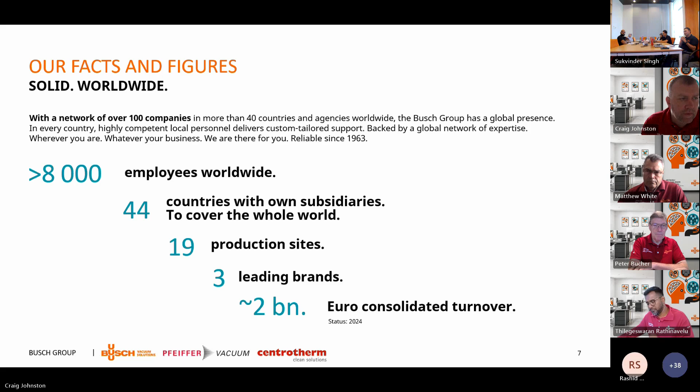Just to concentrate a bit on the Busch side, so you can see where we're based - really all over the world, with various companies in different countries, and production sites that cover the complete geographical spectrum. So we have a very extensive global network, and we are always local to our customer base.

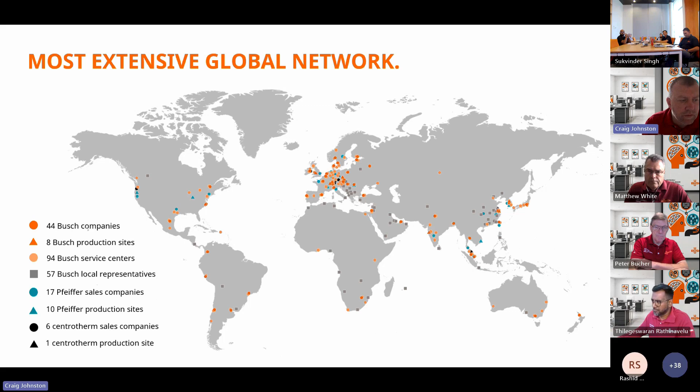So we have a portfolio of 14 different types of technology, and we all have an individual name, let's say, for the different types of technology.

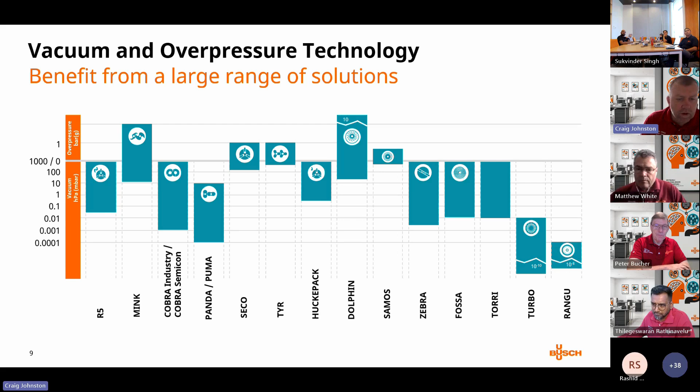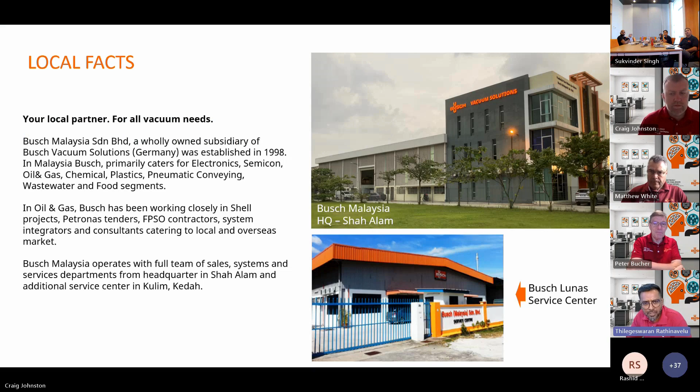Just a little bit on Busch Malaysia. Busch Malaysia is a wholly owned subsidiary of Busch Vacuum Solutions Germany. This distinguishes us from the distributors or resellers we normally see here representing a principal brand, where our focus is not just to build inventory throughput or number of pumps, but we ensure customer after-sales needs are catered at its best long after the purchase.

This we do with multi-year service contracts with end users to ensure asset reliability is sustained. Busch was established back in 1998 in Malaysia, and in the last 26 years we have been supporting our Malaysian customers in various segments, including oil and gas, electronics, semicon, chemical, plastics, pneumatic conveying, wastewater, and food segment. In the oil and gas segment, Busch has been working closely...

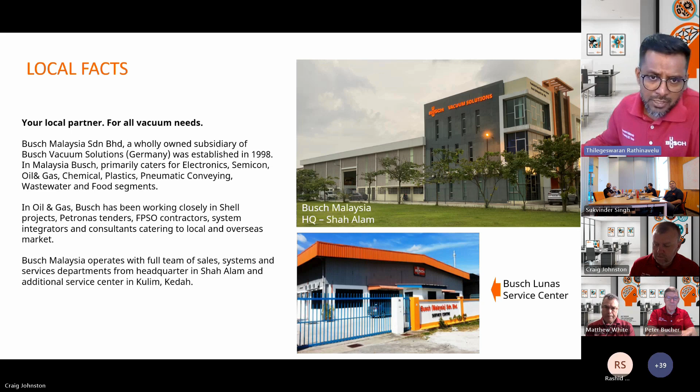Moving on to the application, which is what we're here for today - the flare gas recovery system. I want to run through some high-level information. Assuming we have varied knowledge here on the call today, let's start from the bottom and work our way up. So what is flaring? A flare gas, or gas flare, is a flare stack - ultimately a combustion device used in various process plants, and you're probably familiar with what they look like. Various process plants can be gas wells, refineries, oil and gas production upstream, downstream, and also chemical plants. So everywhere we have a process using waste gas, there's a potential for a flare gas system or flaring stack to be in operation.

The reason why we flare - there are a few reasons, but mainly safety. We're protecting the pressure vessels on that production facility, so pipes or tanks, basically from over-pressurizing, and this is generally due to any operational upsets that can occur on the production side.

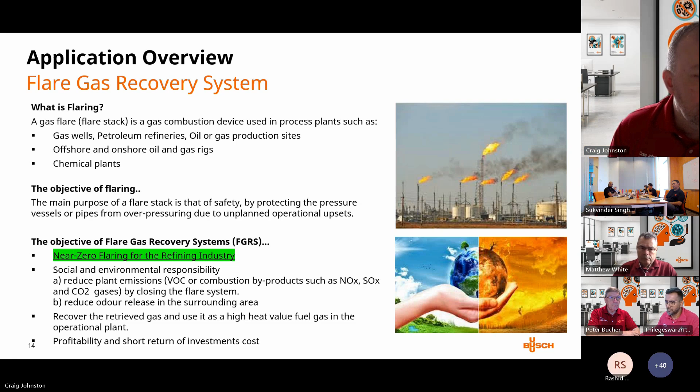The inlet and discharge conditions can be varied also, depending on the flow and the type of gas that's coming into it, the temperature, and also the molecular weight of the gas composition. H2S will be relevant, so the system needs to have a good tolerance towards this very corrosive H2S.

Very much so, the flare stacks are generally in a remote, unattended area of the plant. So the compressor needs to really have a high reliability and availability because of its remote area.

Maintenance and operation costs are key also. So it's not just the capex that customers look at, it's also the opex, the complete operational cost of electricity and of maintenance of the equipment. And of course, we want to have a long equipment lifetime. We don't want early failures or constant maintenance of these units.

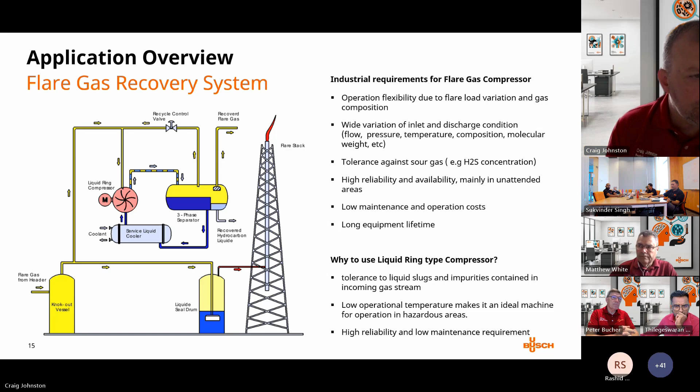Just looking at the detail of the compressor system, which is what we're here for today, some of the main key points. The operational principle: you've got the process gas flowing in from the header, and then this is compressed into the compressor. It's then exhausted out into a three-phase separator.

So this three-phase separator is separating the gas, the recovered flare gas that we're interested in. There'll also be a portion of the seal liquid, so the compressor here is sealed with fresh water. And then also there'll be an element of hydrocarbons that's came through the gas stream that's also settled out. So it's a very important part of the overall system, the three-phase separator.

Once the gas is settled and extracted out, as I mentioned, this is generally sent to an amine scrubber, which will clean the gas and then send it to the plant.

The water that we use for the liquid ring is generally on a closed loop circuit, but with a makeup as well. We actually cool the water too, so we always have a cool running compressor, generally done by a shell and tube type, but it can also be an air fin type.

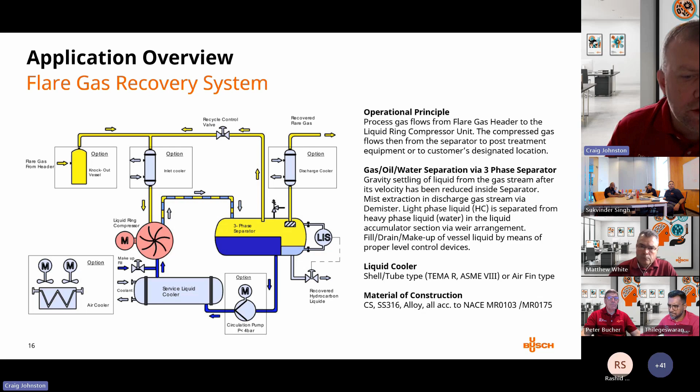This is, let's say, a standard, if there is such a thing as a standard, but a standard system. So each system has various requirements, and these are always dictated by the engineering company or the end user that's responsible for the overall project.

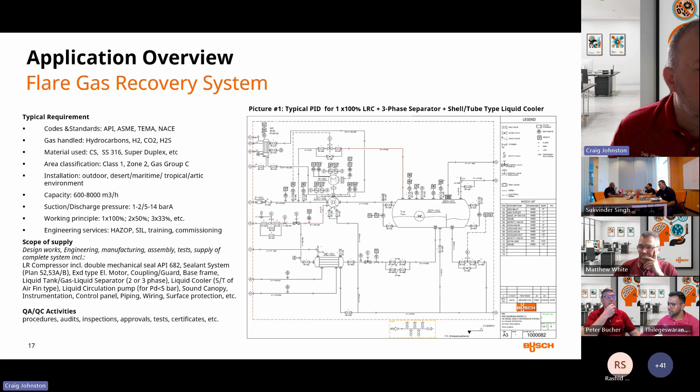The gas handled, we need to know that, what hydrocarbons are in there, H2, so basically the overall gas composition, so we can select the right size unit. Also that helps.

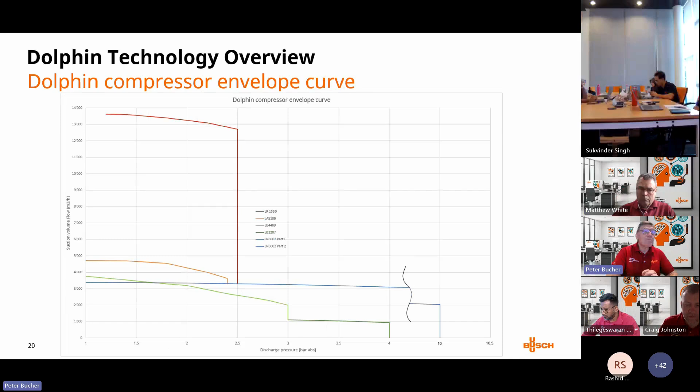So first of all, we have an overview about the sizes, and here we see what we handle in our compressor. So we start here from the discharge. That's the discharge pressure from 1 bar ambient up to 10 bar absolute.

And here we have the volume flow. From the volume flow, you see we have the different sizes we can use, so we have big pumps, big compressors in the volume. This goes only to 2.5 bar. Most in the flare gas application, we have higher pressures up to 6-7 bar. Here we have the LN type, which goes up to 10 bar.

And the volume flow is about 2,000 to 3,000 cubic meters an hour, so that's the blue line. We also have the LB types, and we'll see the difference of the LN and LB types later on in the details.

This goes also to a high pressure, about 4 bar, with higher or lower volume flow. So mainly we can focus on flare gas recovery on the higher pressure side here, while if you need lower pressures, we can have also bigger volumes.

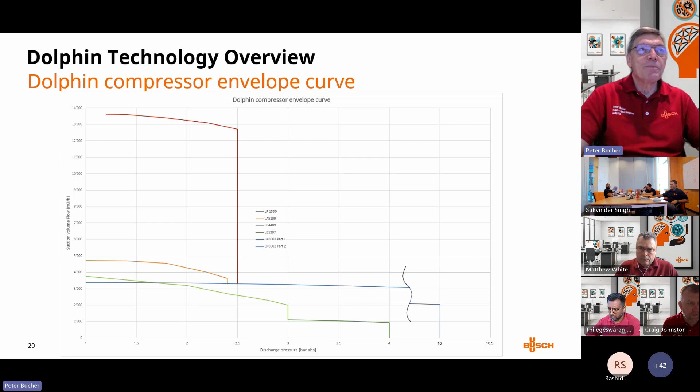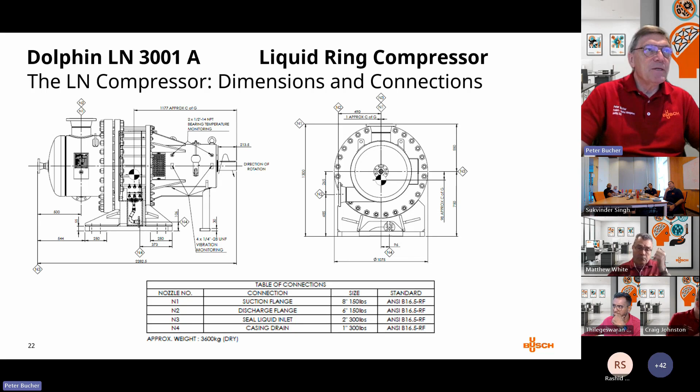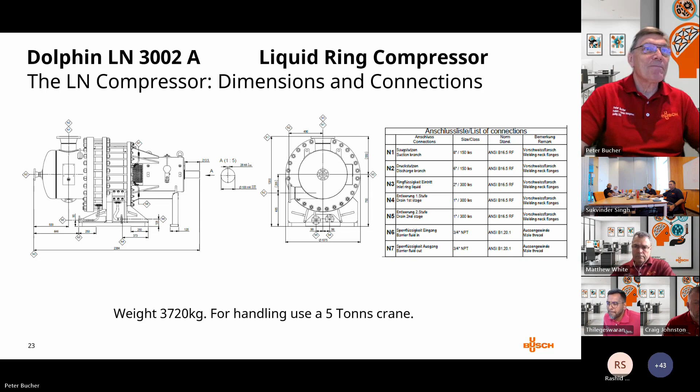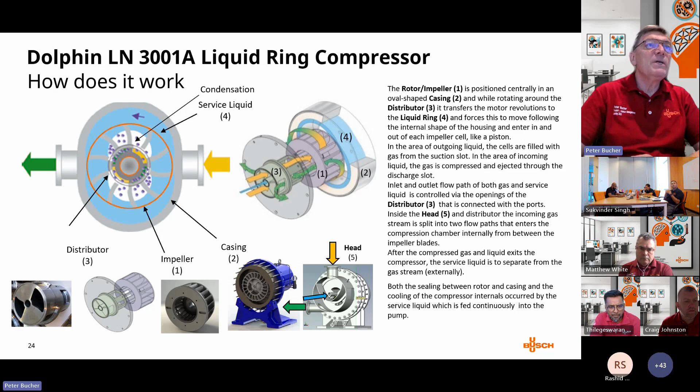This is a big force you have to spend from the motor into the water. Then we look at how the double stage machine works. From a double stage machine, we have then this.

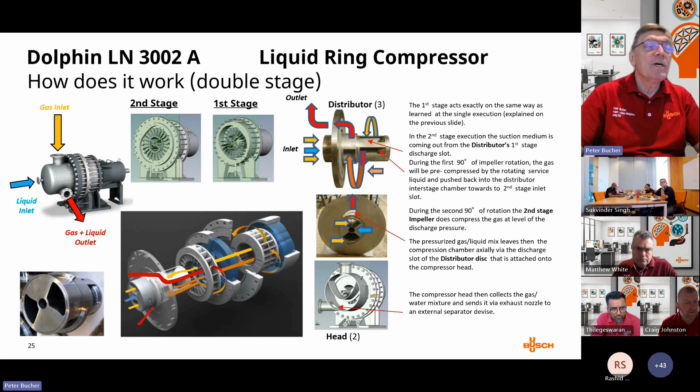From a double stage, we have the suction also from the arrow, the yellow arrow. It goes directly into the first stage, like in the example before. It goes up vertically into the impeller.

The production of liquid ring vacuum pumps and compressors. My main responsibility in the presentation today, my part, I'd like to present to you our conventional flat port plate design liquid ring vacuum pumps and compressors. Similar principle and the same liquid ring technology as the Dolphin LN compressors, which were presented to you today by Peter. Our Dolphin LA and LB liquid ring vacuum pumps and low pressure compressors are single acting with flat port plate. So a more simple design, but a very robust design, which has been in the industry for many years.

Liquid ring technology was developed more than 100 years ago, and it's been used in the chemical and petrochemical industries as a workhorse for vacuum and low pressure compression for many, many decades. We've been producing this type of vacuum pump and compressor technology for more than 50 years here in the UK. We've got many years of experience, and what I'd like to do is give you an overview of the range and some of the applications, not only flare gas recovery, but just to give you an indication of where this product type is used, especially in the petrochemical industry.

So we have a range of 35 models, which consist of both single stage, what we call the Dolphin LA, with an end pressure of approximately 130 millibar, and the Dolphin LB two-stage. Similar to the Dolphin LN, we have single and two-stage. As a vacuum pump, the two-stage has a typical end pressure of 33 millibar, and the same machine operating as a low-pressure compressor is also able to compress up to approximately between 2 and 3 bar overpressure, so that's up to 4 bar absolute.

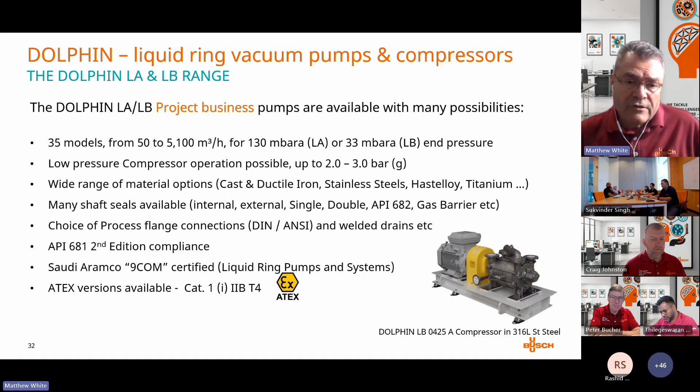We offer our products in compliance with the second edition of API 681, which I'm sure most of you will be familiar with. We also have the Saudi Aramco 9COM certification for both the liquid ring vacuum pumps and compressors, but also systems built by our Busch systems company in the Netherlands. We offer all products with ATEX certification as necessary, which is a standard offering for the Dolphin range of liquid ring pumps.

The benefits to you in the industry: it's a proven technology backed by more than 50 years experience. We test all of our products 100% to the HEI and API standards, or the Pneurop standards, for liquid ring vacuum pump and compressor performance and tolerance acceptance criteria.

We offer a full complement of testing and documentation. So all products and materials will be certified to level 3.1 or 3.2. All the impellers are balanced, and we can offer certification for that balancing and any other non-destructive testing, NORSOK material compliance, and so on. We can offer the pumps with project-specific motors.

So if your engineering standards and specifications are written in specific motors or shaft sealing or bearing lubrication options, we can offer all of that flexibility.

Our products are made here in the UK. We're a production company selling out through the Busch network of sales and systems companies, and Dolphin liquid ring pumps are an ideal solution and offer the heart of really good high integrity systems in these projects.

We also offer combi systems within the group, whether it's with a Roots booster vacuum pump as a first stage pump, or a gas or air ejector, for example, for lower pressure achievement. And we have a lot of application and process knowledge within the group to support you as necessary.

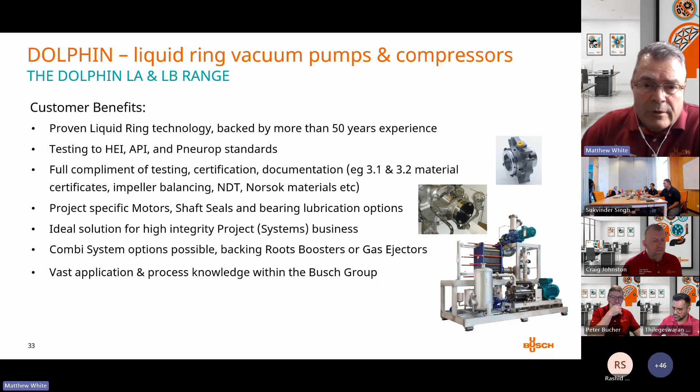Applications for our Dolphin LA and LB, which includes the application we're looking at today, which is flare gas compression and recovery. But in oil and gas, we've got many decades of experience in seawater deaeration, for example, in crude oil distillation, supporting steam ejectors on refineries, also MEG and TEG regeneration, which was mentioned earlier, and any other gas boosting applications.

So just to repeat, Dolphin LA and LB pumps are not only vacuum pumps - a vacuum pump can also operate with up to 2-bar differential pressure. So we can achieve both vacuum on the inlet side and overpressure where necessary, if your process is pumping out to a treatment system, a scrubber or a vent, where we need to achieve and maintain an overpressure on the exhaust side of the vacuum pump. Liquid ring pumps are quite ideal for that application.

Chemical and pharma, typical for liquid ring pumps, it's all the wet processes and more challenging processes of drying and evaporation, where the pump acts as a condenser and will condense the vapors and offer the benefit of volume reduction.

In the power sector, we help support steam turbine condensers in evacuation and holding the pressure needed in a turbine condenser. And in petrochemical, which I'm guessing is most important to most of our attendees today, we offer liquid ring systems for vapor recovery, for flare gas compression, which is the main topic of today's presentation, but also many other production processes - benzene recovery and solvent extraction.

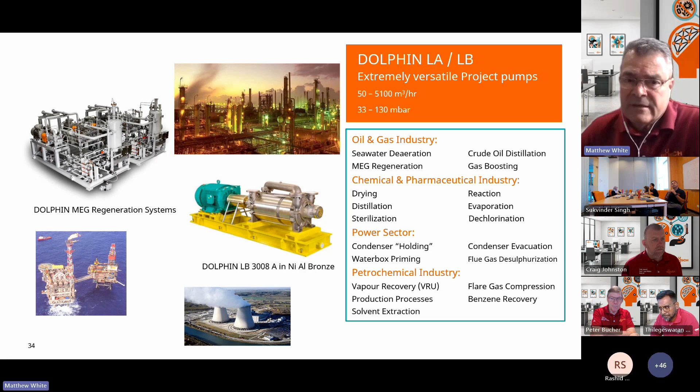But when we need to offer and consider corrosion resistance, we can offer any of the stainless steel alloys, such as the standard 316 stainless steel, super duplex stainless steel, which we're seeing more and more in chemical and petrochemical, originally developed for seawater. So that's our most common material now, either super duplex stainless steel or nickel aluminium bronze for seawater deaeration or deoxygenation, and we have many hundreds of pumps installed globally on that application.

But also then we move up to very high corrosion resistant materials, such as Hastelloys and also titanium - so almost any metal which is suitable for your process.

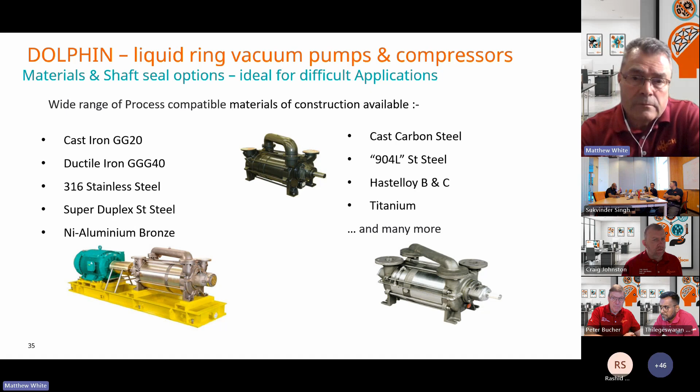In terms of shaft sealing, we need to guarantee leak-free machinery on your processes, and that can be either single, very simple, internally mounted component shaft seals.